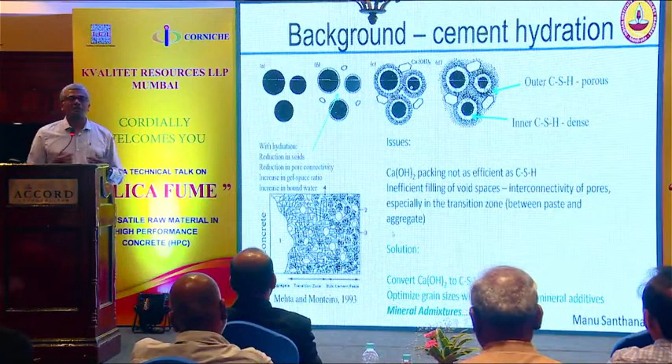So close to the aggregate, you have a zone which we commonly call the interfacial transition zone, where whatever properties of concrete we don't understand, we generally tend to blame on that zone. It's a bonding zone between paste and aggregate. But it turns out there is indeed a difference in the appearance of that zone compared to the remaining part of the paste.

So generally in concrete, if you notice near the aggregate, there'll be more porosity, there'll be more calcium hydroxide, and there won't be as much calcium silicate hydrate, which is the primary binding material formed when cement reacts with water. As a result, we have inefficient packing near the aggregate.

So whenever there's loading of this concrete, the load will concentrate around the stiffer regions. Aggregate being stiffer than the paste will take more load, and the zone around the aggregate will have a slightly higher extent of stress, because of which cracking in the interfacial transition zone begins without much loading itself. It begins at a very low level of load, and that cracking is further worsened because there's more porosity available in the ITZ.

So the packing of the products in the ITZ is not as efficient, and secondly, pores are not filled up properly. Because of this, we generally tend to use mineral admixtures. Any mineral admixture like fly ash, slag, or silica fume will do a good job of filling up the space around the aggregate and densifying the interfacial transition zone.

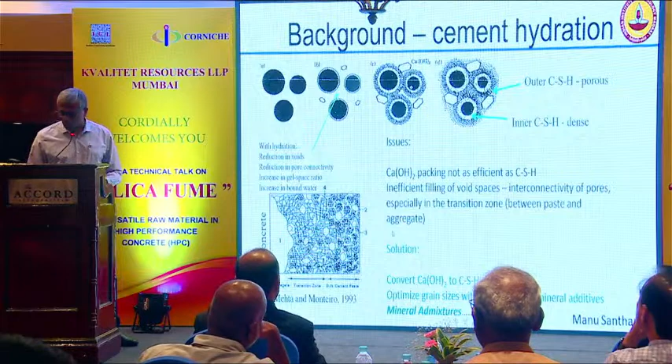Today everybody talks about sustainability, but we have to look at several different aspects when we talk about sustainability. It cannot be just economically viable, or just environmentally good, or just socially good. It has to satisfy all three causes if any technology has to be sustainable. Mineral admixtures help us achieve all of these three, what we call the triple bottom line of sustainability.

Environmentally, of course, we are reducing cement usage in concrete, and when we do that, we are automatically contributing less CO2 to the environment, because cement manufacture is responsible for nearly 6 to 8% of CO2 emissions. Construction itself is about 20%, but imagine 6 to 8% is just coming from cement manufacture. So if you can cut down the extent of cement and concrete, you're already doing positive for the environment.

Second, many of the mineral admixtures are byproducts which would otherwise go as waste or get dumped. We are finding a useful resource from a byproduct, and that's again an environmentally conscious decision.

In terms of the social aspect, when we make concrete with mineral admixtures, we tend to make it in such a way that it has lesser tendency to crack, and it generally performs better in the long run, thus giving a better impact socially. Concrete that does not fail is obviously concrete that is good for society.

And economically also, if you look at the long-term performance, use of these materials is going to give you an improved benefit to cost ratio. As a result, you ultimately end up with a concrete that is more economically viable, but you need to consider the long term. This L1 business of looking at material cost today, that mentality has to go from our minds.

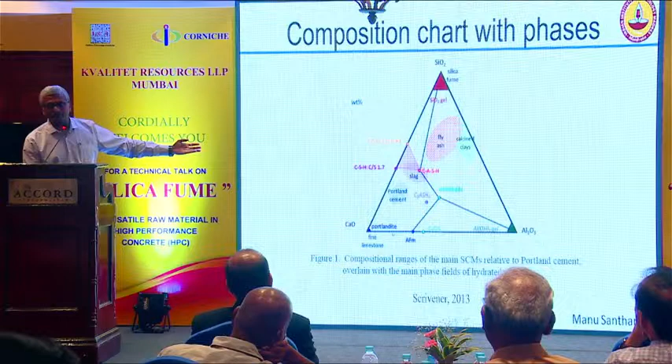Now with silica fume, we are pretty much sure that when we add silica fume, which is reactive silica, it will combine with calcium hydroxide and give you CSH. Now the CSH that you get from that reaction is not exactly the same as the CSH that you get from the cement reaction—both will have different attributes. That's okay. What we need is a material that fills up space, and that's what we get.

So the binders are of different types. One is obviously your cement, or hydraulic cement. Anybody remember why we call cement hydraulic? Why do we call it hydraulic cement? No—all of these need water. All of these systems need water, without which there is no reaction, right?

But cement, ordinary Portland cement, which is rich in calcium oxide, can react with water and set and harden even in wet conditions. Even underwater, cement will react with water and set and harden. That's why it's called hydraulic cement.

Slag possesses something similar. Slag is called a latent hydraulic material, where calcium content is not high enough for it to be reactive on its own. It needs some activation, and that activation, some people call it geopolymer, but what is actually being done is alkali activation. We add alkalis to activate the slag, so we call it AAS, or alkali activated slag, sometimes wrongly referred to as geopolymer, because that's not what's happening there. What is happening is slag hydration.

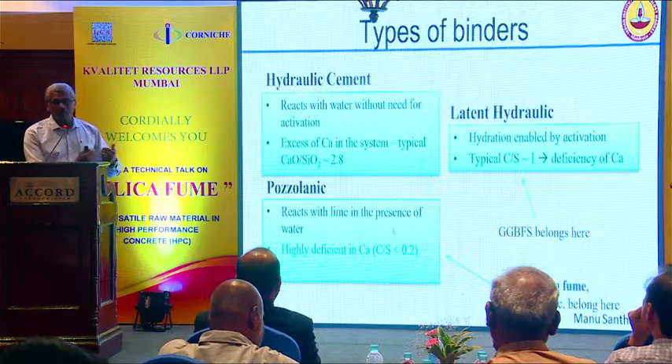So slag can hydrate, it can react with water, but it needs some push or some kick because not enough calcium is there. But when we look at pozzolanic materials, there is no calcium, or almost zero calcium. Silica fume, fly ash, calcined clay or metakaolin, they all belong to the group of pozzolanic materials, which are silica and alumina in abundance, but not much calcium. So there you need to provide calcium for the reaction to happen. Your calcium is coming from calcium hydroxide, from the cement. Cement provides the calcium hydroxide. That's why the combination works very well. When you combine cement, partially replacing it with any of these materials, it works well to improve your microstructure.

So again, just to explain the pozzolanic reaction: you have your calcium hydroxide from the cement reacting with silica or even alumina, because calcined clay will also have reactive alumina, right? And water is an important ingredient, without water there is no reaction. Then you get a mixture of calcium silicate and calcium aluminate hydrates, which is sometimes also given the name CASH, C-A-S-H, calcium aluminosilicate hydrate. This reaction consumes lime, calcium hydroxide, and it refines porosity, as I said earlier. CSH fills up pore spaces more efficiently than calcium hydroxide, so it fills up pore spaces, and obviously that leads to better durability.

It's generally a slow reaction when you consider materials like fly ash or slag. Slag is not really pozzolanic, so this reaction isn't true for slag, but for fly ash or for some grades of calcined clay, this reaction is slow. So when the reaction is slow, it will lower the heat of hydration. But for high purity metakaolin and silica fume, that is not necessarily true. This reaction will be fast, also because the silica is present in very fine, extremely reactive form. And generally when you have alkali or gypsum in the system, like sodium or potassium oxide which is there in your cement, and gypsum also in the cement, this reaction gets accelerated, speeded up.

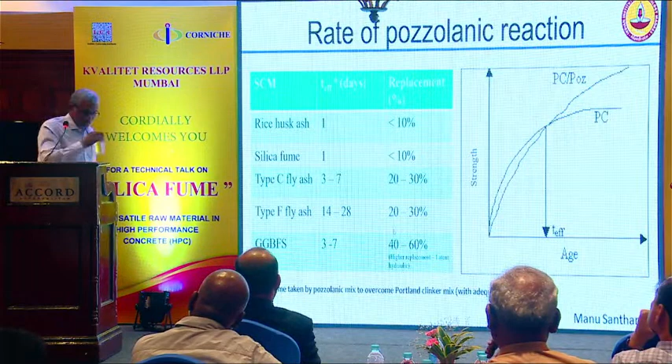At about 20-30% replacement, it will take about 7 days. That's why we need to cure pozzolanic concretes for longer time. Type F fly ash will take a bit longer because it's not as reactive, it doesn't have calcium. So it takes about 14 to 28 days to reach equivalent strength to that of cement.

GGBFS, 3 to 7 days. Again, it depends on the extent, but typically we use a high replacement level of GGBFS, around 50%, in concrete.

Silica fume is typically available in 3 forms. You can get it as it is produced or as collected. You can get it as a slurry or as a densified form. But slurry form I don't think is available in India. It's in the US and some European countries you can get the slurry form.

But what we get most often is the densified form of silica fume. I'll show you why we have to densify it, to get a density which is around 500 to 700 kilograms per cubic meter. I may be off by some extent; maybe the lecture by Mr. Hasbi will have the correct numbers.

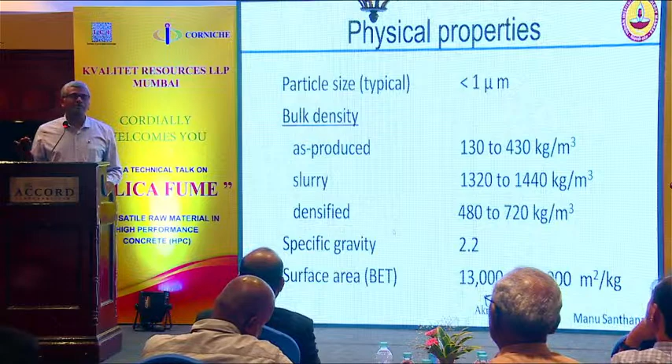Cement particles' average size is 15 to 20 microns. Here we talk about 0.5 microns. So you can clearly see the distinction in the fineness of the material that we are dealing with.

So as the bulk powder is extremely light and the particles are extremely fine, it tends to fly around too much and cannot be packaged efficiently. If you take a regular 50 kg bag of cement and try to pack silica fume in that same bag, you may hardly get 5-6 kgs if you take the bulk powder. That's why, to make it easy to handle and transport, we need to densify it. So dry densified silica fume is what is typically available in the industry.

Here compaction by pressure is done so that the grains get flocculated. They start forming condensed particles. So when you use that in concrete, you obviously need efficient dispersion provided by superplasticizer and good mixing with the aggregate to break down the particles and completely distribute the fine particles of silica fume. That's what you want ultimately.

As a slurry, there are obviously problems because 50% is water. Imagine the storage space - for every 1 kilogram of silica fume, you need to provide storage space for 2 kilograms of material. And compensating for the water in the mix design is a very complicated process. Although as a slurry the mixing of silica fume is very easy, it has its problems of handling and storage.

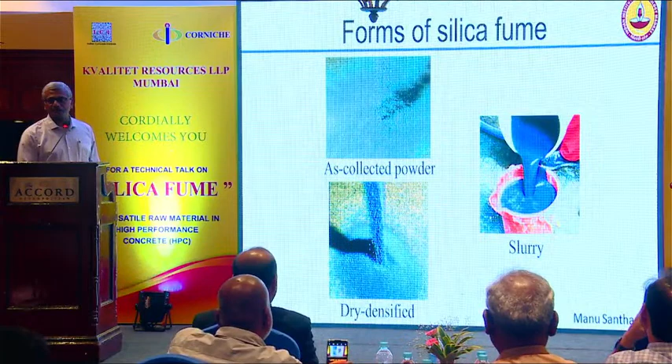Just to show you pictures - I'm sure you'll see better pictures elsewhere - you can see the bulk powder just flies around. When it's densified, it's almost like cement. As a slurry, obviously it's a liquid, so it can be used quite easily and efficiently.

Just to show you a comparison of particle sizes, you can see silica fume sizes are much smaller compared to cement particle sizes - as I said, 0.3 to 0.5 micron versus 15 to 20 microns.

Because of this, the effects on fresh concrete that can be expected include an increase in water demand of concrete. Silica fume should not be used without superplasticizer. Any concrete should not be made without a water reducer or superplasticizer - I always talk about this in every forum. If you are making concrete without chemical admixture, you will be spending too much cement to make simple grades of concrete like M20, M25.

You can optimize your mix and use less cement to produce the same grade of concrete if you use a super plasticizer. So any concrete today which does not use water reducer or super plasticizer is not sustainable in my opinion, because we're using too much cement to get the workability. Since water cement ratio is fixed, you increase the cement to get the workability. But with the super plasticizer you don't have to do that. So that is true of any concrete - you have to use water reducer or super plasticizer to see efficiency happening in concrete.

But silica fume concrete goes without saying, because of the fine particle size and the expected increase in water demand, it should not be used without super plasticizer.

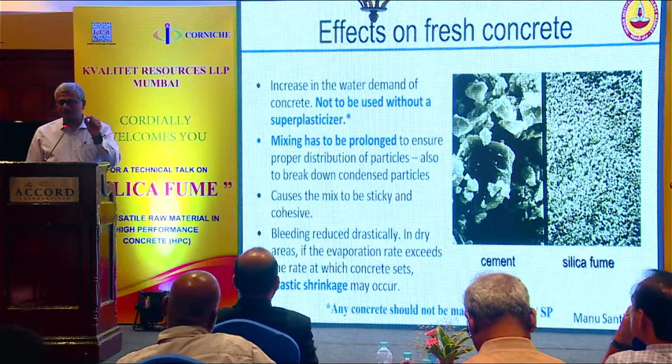Second thing, which many sites are not handling well, is that you need to prolong your mixing with silica fume. Silica fume, as I said, is in condensed form. This has to be broken down and efficiently dispersed by the super plasticizer. How do you break it down? By mixing - the aggregates will tend to break these particles, and the super plasticizer will efficiently deflocculate them. If you don't mix well enough, you're not going to achieve the result you want, because you want that fineness - that's the reason you're putting it in there. You want that 0.3 to 0.5 fineness to really fill up the spaces efficiently. That's when it will work very well, and for getting the reactivity.

Mix can become sticky and cohesive, so you have to design your slump carefully, because any fine material will do that - stickiness will increase.

But more importantly, whenever you're using not just silica fume, but any mineral admixture as a replacement of cement, you can expect that if you don't pay attention to the concrete in the early stages, plastic shrinkage problems will definitely happen. This is true of any concrete with mineral admixture - fly ash, slag, anything - because most of these materials are finer than cement. Secondly, as I said earlier, because you're replacing a denser material with a lighter one, the paste volume goes up. You have more paste in your system, and when you have more paste, you get more shrinkage.

Here also, in the early stages, you need to ensure that you protect your concrete from drying, especially when making slabs with very high surface area. So protection of the concrete is important - simple floating of the concrete when cracks appear in the beginning, especially with flowable concrete like SCC. SCC is being used everywhere now, so with SCC especially, you need to be extremely careful about floating early to ensure plastic shrinkage cracks do not form.

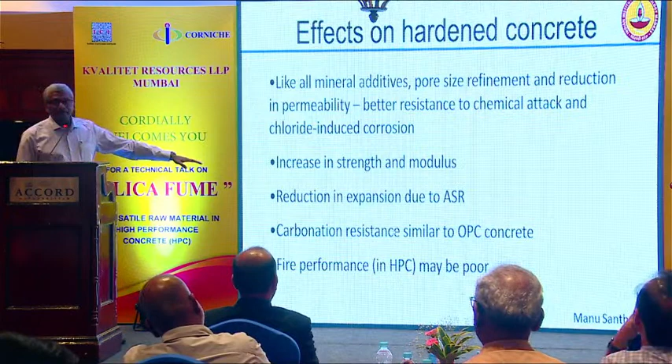In alkali silica reactivity, silica fume can do very well, but that's also true of all mineral admixtures. Whenever your aggregate is not of good quality, if it's reactive, all mineral admixtures will help reduce the extent of expansion. On carbonation resistance, this is where many other mineral admixtures like fly ash or slag, because of the amount we use, generally perform poorer. But silica fume concrete, at least the data we've seen, seems to have similar carbonation performance. Of course, silica fume is used only generally in high-grade concretes, so you'd expect carbonation to be low in any case.

On fire performance, we learned this from the accident in the Channel Tunnel between England and France - fire performance of silica fume linings, the high performance concrete linings, was not good because it's very dense.

When fire transforms water to steam, the steam doesn't have a way to come out of the concrete, so spalling can happen. That's why people recommend polypropylene fibers be used whenever fire hazard is present, because when fire happens, the polypropylene fibers melt and create pore spaces through which the water can escape. So with tunnel linings done in silica fume concrete, if fire hazard is a problem, for instance in a roadway tunnel, one should look at the possibility of also using polypropylene fibers.

So when should silica fume be used? Since I'm not giving a marketing presentation, there are some criteria you should apply. One, it should be used for high strength concrete applications. It's usually desirable in a ternary blended form with another supplementary material, like cement plus fly ash plus silica fume, or cement plus slag plus silica fume. For providing good durability characteristics, especially in rapid chloride penetration tests, silica fume concrete gives excellent results in these environments.

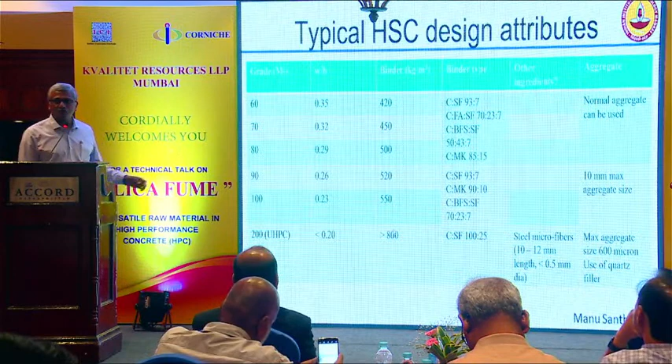Just to give you some indication of higher grades of concrete, here are typical water binder ratios. Of course, this is with Chennai aggregate, because it's not the same in other parts of the country — you may have to alter the designs a bit to get the same strengths. In Chennai, we are blessed with excellent aggregate, because of which we can design concretes with generally lower binder contents and moderately higher water binder ratios than elsewhere.

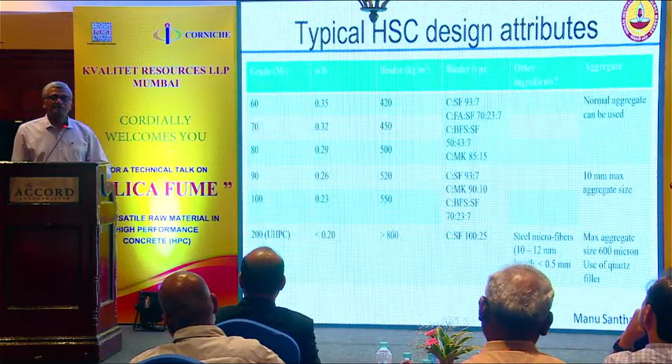But 200 megapascal UHPC is playing a role today. People are trying to look at replacement of steel in some sections — I'm talking about structural steel in compression members, where you can easily use UHPC instead. It can provide sufficiently good flexural resistance also, to give good performance. Here, steel fibers are typically used, short steel fibers, but silica fume is an integral component of most of these high-grade concretes.

So just to summarize, I don't know if I was expected to talk this long, but yeah — silica fume is an excellent material when designed and used with proper supervision and control. Very important to understand that.

Always ensure that the supervision and control with any high quality material has to be top class. It is a desirable ingredient for high performance concrete. You should use it whenever you need to do very good in durability.

Of course, there are products which are also worthy to mention here, like metakaolin, which can produce equivalent durability levels to silica fume, but it needs slightly higher dosages as compared to silica fume. Ultrafine slag can also be another material that we can use, but the extent of durability performance in terms of the test results that it gives you may not be of the level of silica fume.

At least from the data that I've seen. And as I said, it's a necessary ingredient for ultra high strength concrete, without silica fume, UHSC will not be really possible. So thank you all, I'll stop with that.

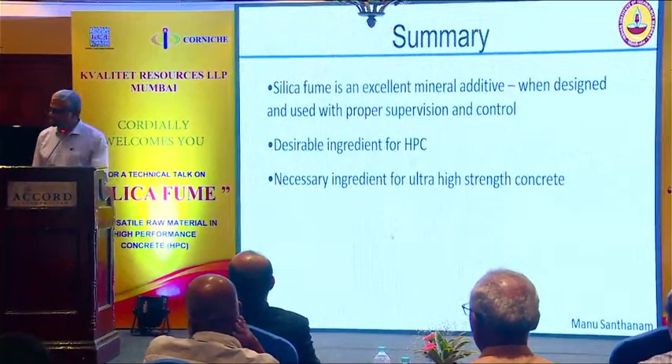Questions at the end or? End, yeah, sure.

Thank you, sir, for creating the platform for today's presentation and providing a detailed understanding of silica fume. So further, we move upon to facilitate our guest of honor, Mr. Rajesh Ladhat, Managing Director, Structural Concept Designs Private Limited, Mumbai. Mr. Rajesh Ladhat is a civil engineer, graduated from BVB College of Engineering and Technology, and he started his career as a design engineer with PT Gala Consultant Engineers, and he has worked for various projects in residential, commercial, public structures, etc. He has started his Structural Concept Designs Private Limited in 2001, and his company achieved the milestone of 1,000th project in the year 2014, and till date they have crossed more than 2,000 projects.

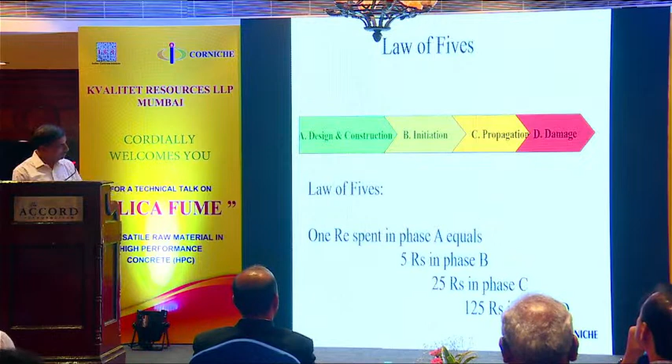I always believe in the law of 5s. Any project, it starts from the drawing board: design, construction, initiation, propagation, damage. And I always tell people that during the construction stage itself, don't be fussy about spending a little more so that the durability will be there, because repairs are always very expensive.

It is not silica flour or silica dust, and it is not micronized silica. Both these products are ground crystalline quartz powders.

And it is not fumed silica, it's not precipitated silica, it's not gel silica and colloidal silica. These are chemically treated silicas, but they go in for different applications, like the rubber industries and pharmaceutical industries.

Coming to development of silica fume concrete, it's not a new product. It has some history. The first fumes were collected way back in 1947. In 1952, samples of silica fume concrete were buried in acidic sulfate-rich soil outside Oslo, and the durability studies are still going on, giving excellent results. In the 1970s, filtering systems and concrete trials first started in Canada.

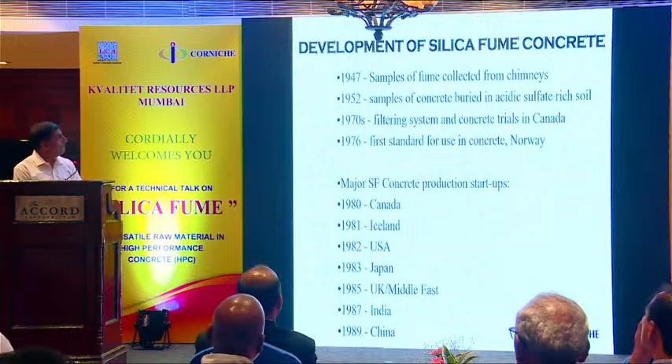Currently, to summarize, there are over 12 standards and codes of practice for silica fume. ASTM C1240 - I have put XX because you should always look for the latest one available; the latest one available now is 2020. And IS 15388, 2017, which is a second revision. There's also the Canadian standard and the European standard.

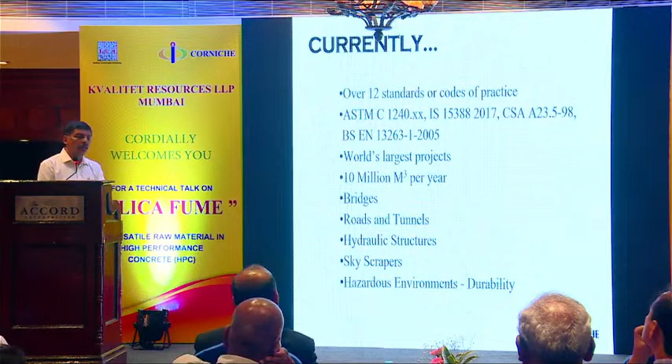It's used in the construction of the world's largest projects, and as per our market guesstimate, more than 10 million cubic meters of silica fume concrete is produced every year. It's used in the construction of bridges, roads and tunnels, hydraulic structures, skyscrapers, and hazardous environments like the Deepak Fertilizer project, which was for durability purposes.

Standards I've tried summarizing here - ASTM, European, Canadian, and Indian. Everything, if you see, requires a minimum amount of amorphous silicon dioxide, 85% minimum silicon dioxide. The next thing I want to show is the loss on ignition and the alkalis.

Loss on ignition - I think slowly they're trimming it down further. It should be less than 6%. The specific surface area requirement asks for a minimum of 15 meters square per gram. And the pozzolanic activity index - ASTM asks for 105%, and our Indian standard asks for 85%.

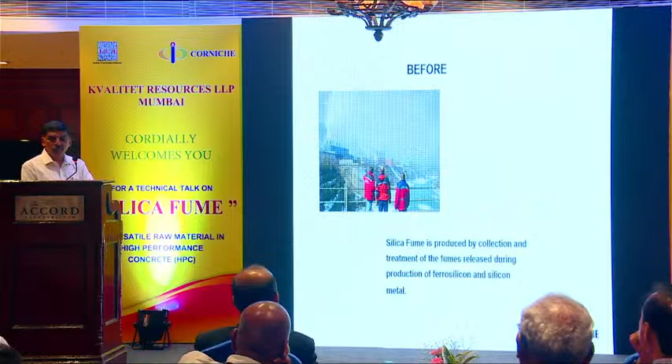This is one of our industries in China. Till the late 90s, early 2000s, this was what it looked like - highly polluted. And my marketing man tells me the dollars were flying.

So today, we are collecting the fumes which are going out as a pollutant. This single plant, this single industry has 18 plants, producing close to 150,000 tons of silica fume annually, and all 18 plants are silicon metal plants.

This is one of the Bhutan plants, which is producing high-grade ferrosilicon. They produce 3,000 to 5,000 tons.

So generally, coming to the metallurgical production of silica fume - I've tried to show how a visible pollution problem is eliminated by removing the silica fume from the smelting furnace, and at the same time, it's used greatly in concrete.

Raw materials are quartzite and black materials. Quartzite is crystalline silica, and black materials are various forms of carbon - coal, charcoal, wood chips, coke, semi-coke. Smelting happens at around 2000 degrees.

It's a two-phase reduction - SiO2 gets reduced to SiO, and SiO further gets reduced to metallic silicon. And since it's an open-top furnace, the intermediate SiO comes in contact with atmospheric oxygen and gets oxidized back to SiO2 - amorphous SiO2 - which would have otherwise gone out as a pollutant out of the chimney.

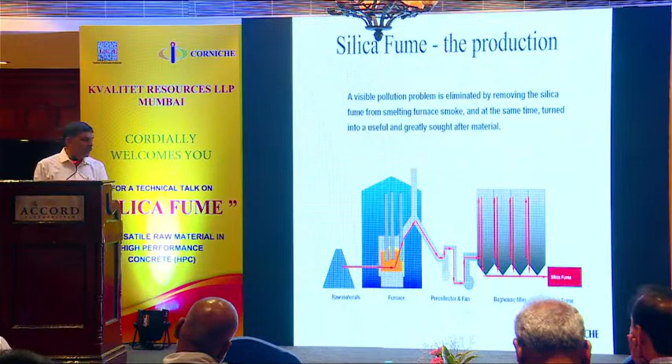So we densify the material for two reasons. One is transportation becomes very expensive — in a 20-foot container which carries 20 tons of other raw materials, we can hardly put 7 or 8 tons of undensified material. By densification, we can increase the quantity and come down to needing fewer containers, handling 18 to 20 tons.

What happens inside? Temperature could be between 1980 to 2010. There's a two-phase reduction — SiO2 getting reduced to SiO, and then further reaction. Metal is tapped periodically, and some of the SiO comes in contact with atmospheric oxygen to get converted to amorphous silicon dioxide.

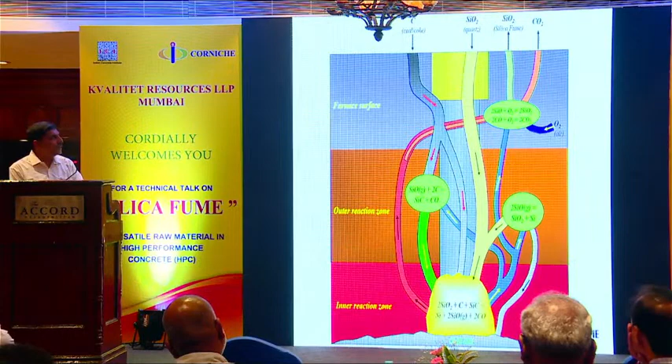The metal, and schematically, the raw materials are quartzite, black materials, and carbon electrode — carbon is also a form of carbon, and we need lots of energy. That is the reason it's not produced much in India. India has very rich raw materials — we have the best quartz available and we have black materials, but power is very expensive here.

To produce 1 ton of silicon metal, we need 15,000 units of power, and to produce 1 ton of high-grade ferrosilicon, we need 10,000 units of power. So India is the only country which exports quartz to the countries that produce silicon metal.

So when I show this particular chart — silica fume today is no more a byproduct, it's a co-product. We are designing the raw materials, what you'd call the mix design; in metallurgical terms I call it the burden calculation. I put the right amount of material to produce two products: the silicon metal and silica fume. In case of ferrosilicon, it's high-grade ferrosilicon and silica fume — silicon metal, the lumps, and the fume.

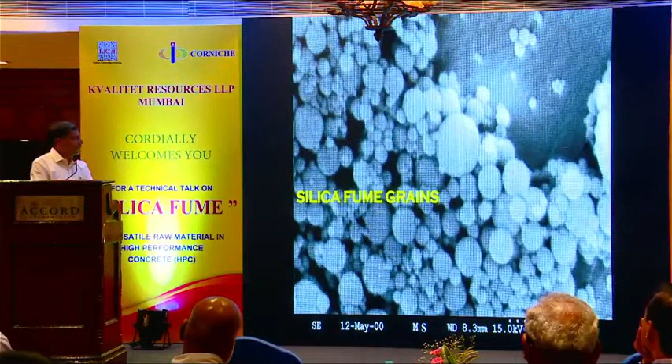How does the silica fume look like under SEM? Perfect spheres, amorphous spheres, 0.15 microns in diameter — finer than cigarette smoke. Silica fume, a product of the silicon alloy industry, is made of glassy microspheres, 0.15 microns in diameter average particle size. It's a pozzolana, it reacts with calcium hydroxide, and it could be anything between 85 to 98% amorphous reactive silicon dioxide.

So, as Manu sir said, it forms an undensified material of 150 to 350 density. We densify it pneumatically to bring the density between 500 to 700. And in a few countries, you get the material in pelletized form also. In a country like Iceland, the aggregates are very reactive.

Use of silica fume in every kg of cement is compulsory there, so they get silica fume in pelletized form and it's interground in the cement production itself — they use silica fume blended cement there.

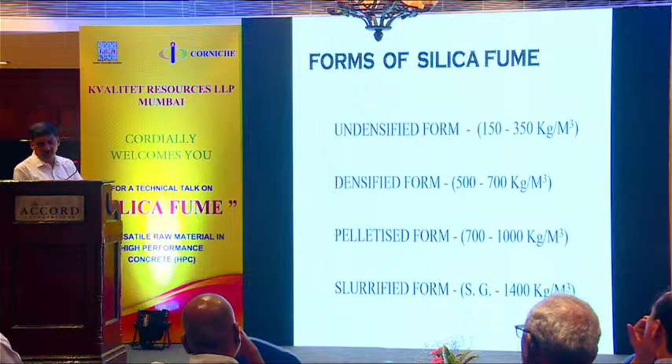And the slurry, as Manu sir said, its use is very common in Europe and the US. It's very simple — slurry is nothing but 50% water and 50% powder. If I want to import it into India, I'll have to pay for transportation of water, and I'll pay import duty for water too — it becomes very expensive. Only one project, Bandra Worli Sea Link, used this, where we produced instant slurry at site, not a stable slurry.

Undensified silica fume has a bulk density of 150 to 350, densified between 500 and 700, and slurry is 1400 kg per meter cube. These are the densified material, undensified material, and the slurry forms.

Properties of silica fume: it's amorphous in nature. When I say amorphous in nature, there's no health hazard, no health risk. You can breathe it in and breathe it out.

Its particle shape is smooth, spherical particles, with particle size of 0.15 microns. It's approximately 80 to 100 times finer than cement particles. Specific surface area is 15,000 to 30,000 meters square per kg.

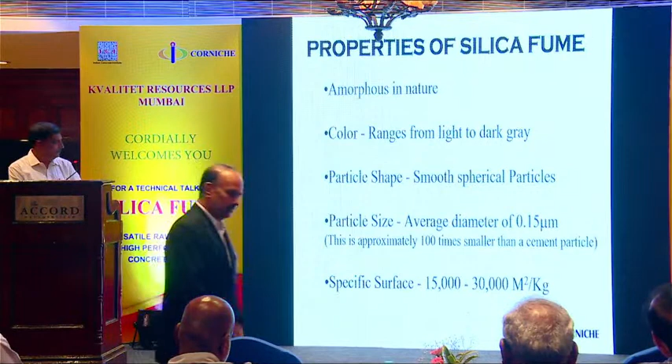What do you mean? Take a standard football - the quantity of silica fume which can be filled in the football, that quantity can be spread over the entire football ground. It covers that much amount of area.

So I've tried comparing silica fume with fly ash, slag, and OPC. It stands out in two things. It's highly siliceous as compared to the other three.

And see the fineness - while the other three fall between 300 and 700, silica fume is a minimum of 15,000 to 25,000 meters square per kg. The other three are measured with Blaine's method, and here we use a BET nitrogen adsorption method.

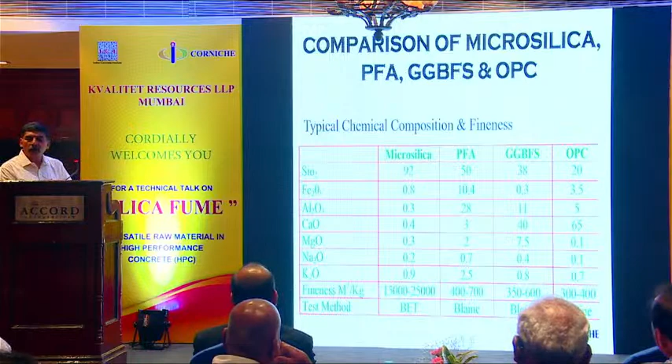Basically, physically it acts as a filler, and chemically it reacts with calcium hydroxide to form calcium silicate hydrate gel.

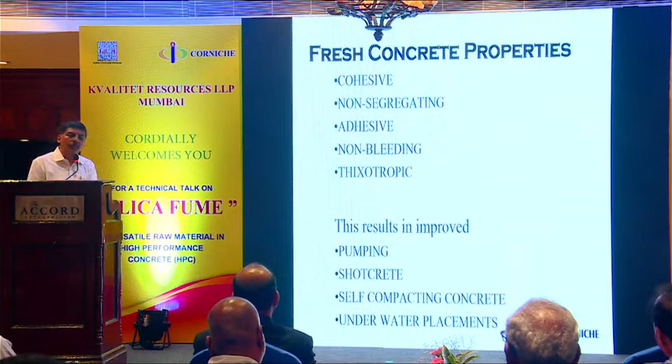This results in improved pumping, shotcrete applications, self-compacting concrete, and it can be placed underwater. There is no washout.

Non-segregating - this is a 250 mm plus slump. Two things you observe: the formwork is not all that good here. Had it been ordinary concrete, slurry would have come down from the bottom. Also the water standing on the floor is not getting mixed with the concrete. Silica fume concrete does not allow anything in, nor does it allow anything to get out.

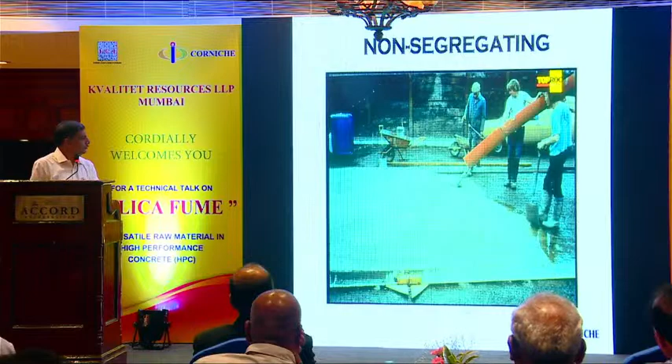It can be pumped to various distances, various heights, with no segregation.

Placing, finishing, compacting, curing - since silica fume concrete is produced with a very, very low water binder ratio, curing has to be adopted immediately because the surface tends to dry off.

So silica fume concrete does not bleed. It must be cured properly to prevent drying out, especially in a hot weather environment like ours. Common practices include mist-spraying, ponding, membrane coating, wet hessian, shading, and minimum 7 days wet curing.

So hardened concrete properties - it makes the concrete stronger, impermeable, and both put together, durable. And durability against abrasion, erosion, against chemical attack, against water, chlorides, sulfate, and ASR - alkali silica reaction.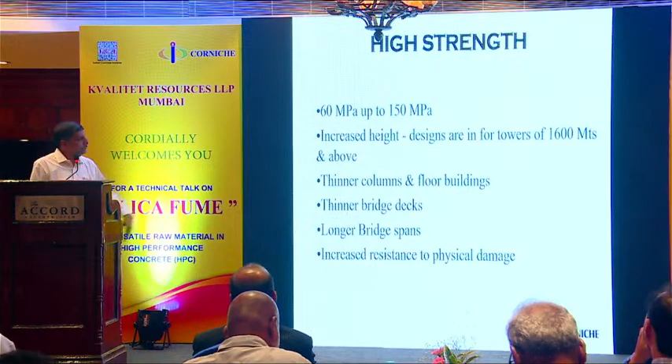High strength - since the last 2 years, I have changed those numbers. I used to operate at 45 in India, up to 90, 100. Now, since they are producing high-grade concrete, I've increased it to 60 to 150. We are producing really high-strength concrete today in India. Increased height designs are there for towers of 1600 m and above - thinner columns at floor buildings, thinner bridge decks, longer bridge spans, increased resistance to physical damage. These are the advantages you get.

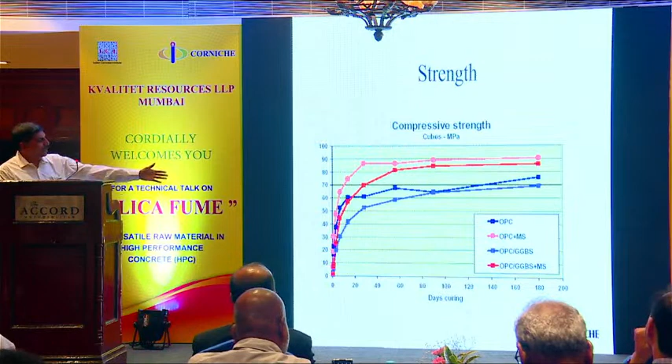And for strength, if you see, in silica fume concrete you are able to achieve the desired strength in the first 7 days itself, minimum 80%. And ternary blends, triple blends, are even better. Here I've taken OPC, GGBS, silica fume - it will be a similar pattern with OPC, fly ash, and silica fume.

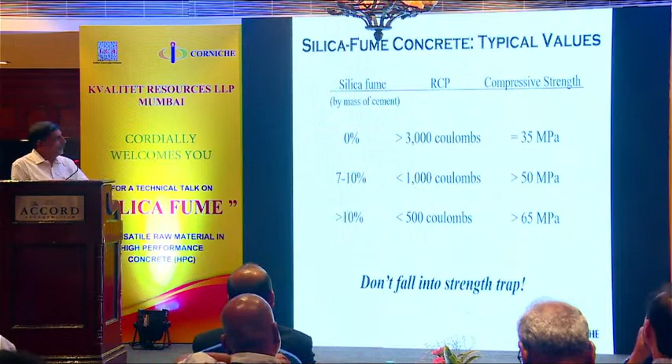So for silica fume concrete typical values, by adding 7 to 10%, you will be able to achieve less than 1,000 coulombs. Above 10%, I would not recommend, because, as Manu sir said, it just acts as a filler. And since we are importing it, it's a very expensive filler in India.

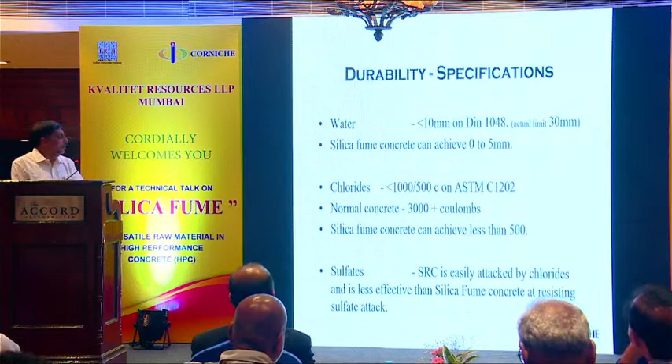So durability specifications, as per DIN, ask for 30, but many designers are specifying less than 10 mm. Silica fume concrete can achieve less than 5 mm. In most cases, it is nil, less than 2 mm. For chlorides, they are specifying 1,000 coulombs in very aggressive environments - they are even specifying less than 500 coulombs.

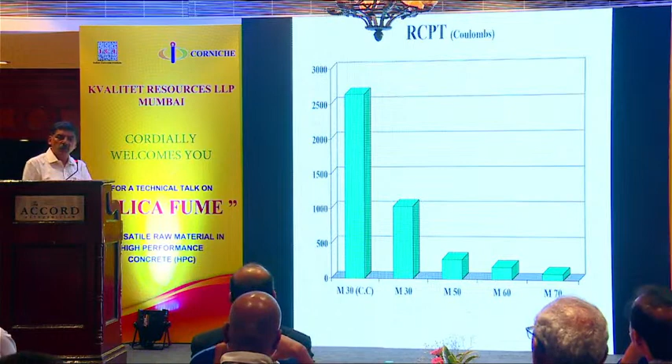So, silica fume based abrasion resistant concrete - I showed you about the Kinzua Dam. I'll show some slides. It was built in 1967. It came up for first repairs in 1973-75. The primary conclusion was that the aggregates were not hard enough - they were soft, local aggregates.

So the conclusions: do not use fiber reinforced concrete, use the lowest possible water-cement ratio, use the hardest available aggregate. Continuous efforts to fight this problem led to high strength concrete containing silica fume.

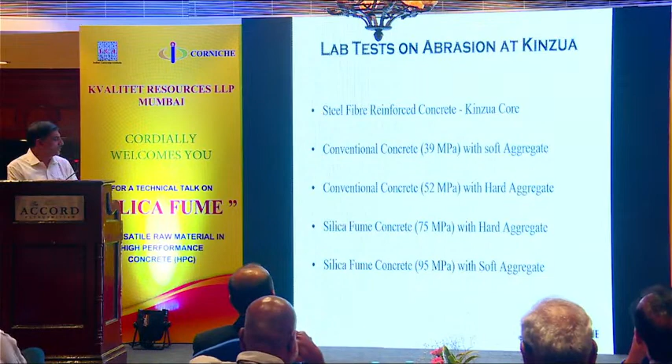So what lab tests did they do before coming to the silica fume concrete? Steel fiber reinforced concrete with Kinzua - that's a local aggregate - conventional concrete with soft aggregates, conventional concrete with hard aggregates, silica fume concrete with hard aggregates, and silica fume concrete with local aggregates. It's a 72-hour testing. Every 12 hours they take out the sample and see the weight loss, which has been jotted there.

Specification-wise, finally what they did was - they wanted around more than 80 megapascals. Cement, maximum 415 kg. Silica fume, minimum 15% - as a salesman, I'll be very happy to sell more silica fume. And the water-binder ratio was 0.3. This is in 1985 in the US.

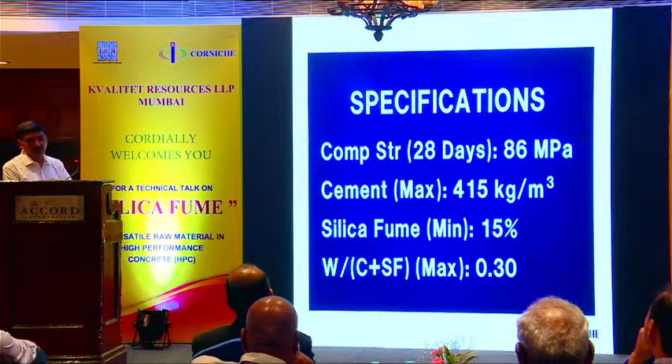Ultimately, what they used there was 386 kg cement, 70 kg silica fume, water-binder ratio 0.28, a minimum 250 mm slump. The results: 7 days, 69 megapascal, and at 28 days they were hitting 95 megapascal, even with the local soft aggregates.

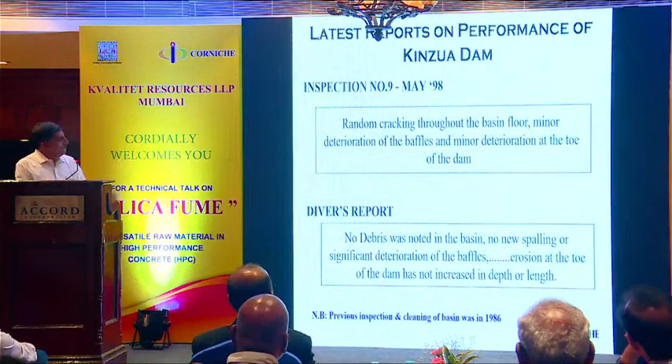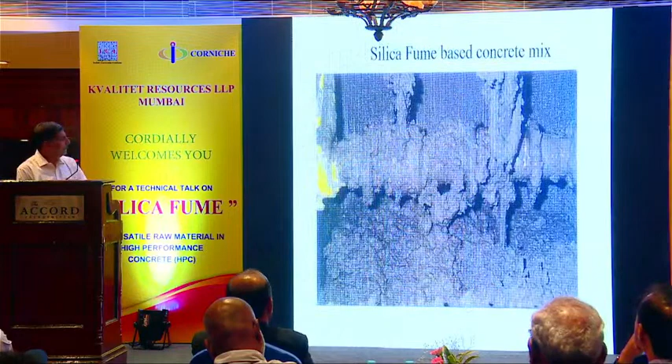Mixing is very important - I would recommend very good mixers. This is a very fine material, dispersion is key. This mixer is really working well - look at it closely. The mixing sequence also comes purely through experience.

Coarse aggregates - add silica fume into the mix as early as possible, along with the aggregates, because the densified material has to disperse. It starts breaking down when it comes in contact with aggregates. Then fine aggregates, some water, remaining fine aggregates, cement, superplasticizer, and water. Make sure you add superplasticizer only when cement is in the mix, because when we tried mixing silica fume with superplasticizer directly, it binds and makes a ball - it doesn't allow silica fume to disperse.

For the mixing sequence at site, we won't have the same luxury as in the lab. So: coarse aggregates, fine aggregates, silica fume, cement, superplasticizer, water. The only recommendation is to mix as much as possible - don't be in a hurry, give more mixing time for better dispersion.

So the mixes for Tehri are M30, M50, M60, M70, as you can see. For Tala, in this case it was slag cement; with Tehri it was OPC.

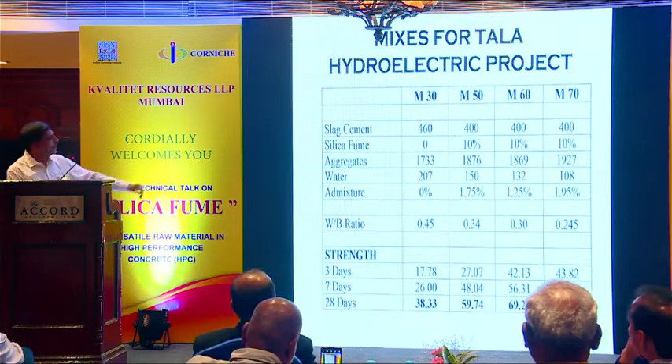The only change we made was the RPM - what's recommended as per ASTM is 1100 RPM. What we were given to understand is that the velocities of water encountered in any dam here are approximately 45 to 60 meters per second. Working backward, with 1100 RPM it was way, way too slow - it was giving us only 18 to 20 meters per second. So we increased the speed by 3 times. All the tests we did in India were at 3,360 RPM, to simulate and come closer to real life conditions.

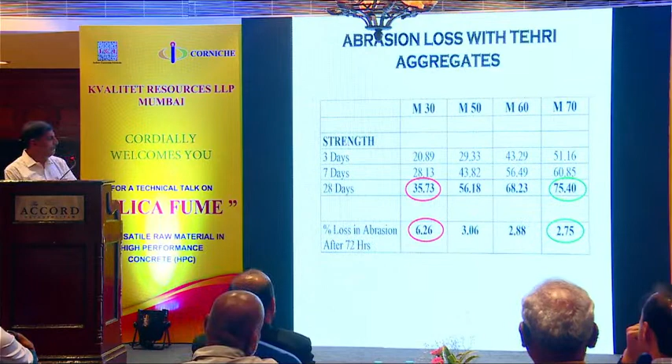Abrasion losses, you can see - the numbers with silica fume concrete are coming down. I'll show the condition of the samples. When we went beyond 72 hours of running this, the conventional concrete started giving away completely, while the silica fume concrete was flat - no abrasion.

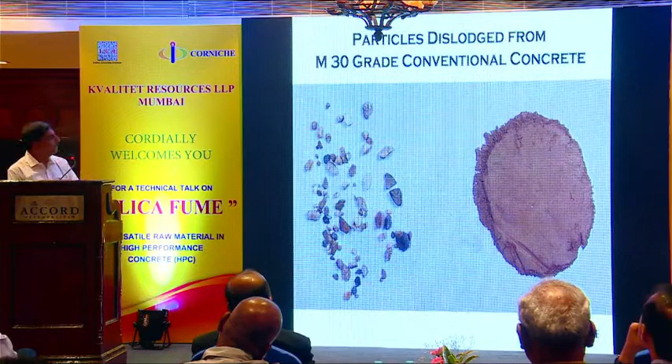Same with Tala. This is a 28-day cured sample before putting into testing - conventional concrete, M30. After 72 hours this was the state - lot of wear and tear, and the bond was not good, so aggregates were peeling off because of a weak bond. You can see cracks and aggregates peeling off closer up. We collected the residue, the worn material, and you could see some of the peeled aggregates because of the loose bond in conventional concrete.

With silica fume, M70, after 72 hours only the top watery layer had gone off. The bond looks good - have a look. And in the residue there's no peeling of aggregates or anything - they were holding on.

So the observations: use of silica fume concrete helped in reducing the loss on abrasion by around 40%. The cracks around the aggregates in conventional concrete indicate further dislodgement of aggregates if tests were continued, while a good bond between aggregates was seen with silica fume concrete. Strength alone is not the criteria - use of silica fume concrete helps in attaining high strength and ensures better bond between aggregates, making the concrete highly resistant to abrasion and erosion. This improved durability makes high-performance silica fume concrete the most suitable one for hydraulic structures.

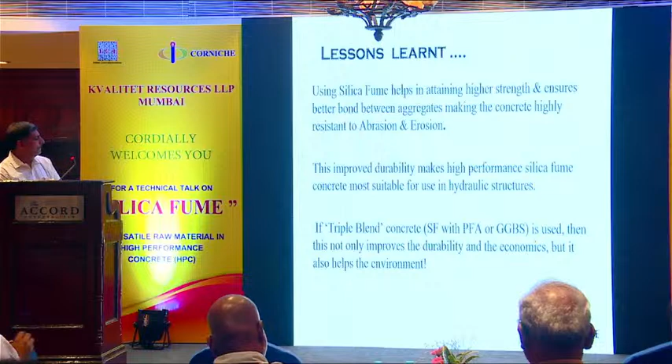So ternary blends can be even better - that has been shown in Tala with slag cement. High-strength silica fume concrete does work as anticipated in situations of high exposure to abrasion and erosion forces.

Coming to high-performance concrete in India, it's been used in construction of nuclear power projects, hydropower projects, roads, bridges and tunnels, high-rise structures, repair and rehabilitation projects, and hazardous environments - the Deepak fertilizers, as I mentioned.

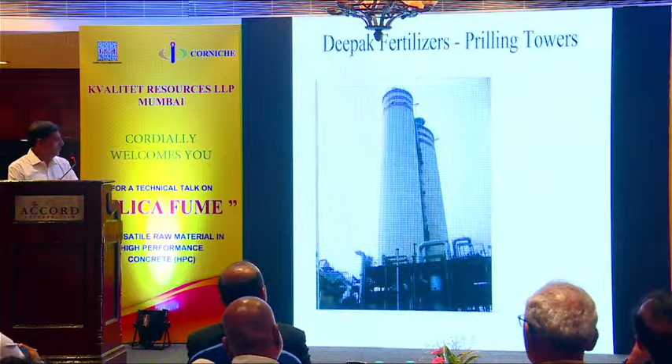This is the Prilling Tower and Deepak fertilizers. This picture I had taken in 2019. It was done in 1990-91 and still looks new. M35 concrete. Along with the aggressive raw material, they were using acid also as one of the raw materials for producing it, so it's basically an acid resistant concrete.

Nuclear power projects. I think after the Kaiga accident, they went in for the silica fume concrete dome, after consulting with the CEA of France. They used 2,000 cubic meters of concrete per dome for the 2 domes. Same with Kota, they parallelly started that in 97-98. Based on the usefulness and what they saw, Tarapur, the new greenfield project, used almost 125,000 cubic meters. The entire reactor building is done with silica fume concrete.

Today I think they're specifying it for nuclear waste handling systems to prevent radiation leakages. The requirements were that the pressure containment vessel should satisfy structural integrity, leak tightness, serviceability, and durability. High-performance silica fume concrete was able to cater to all these requirements.

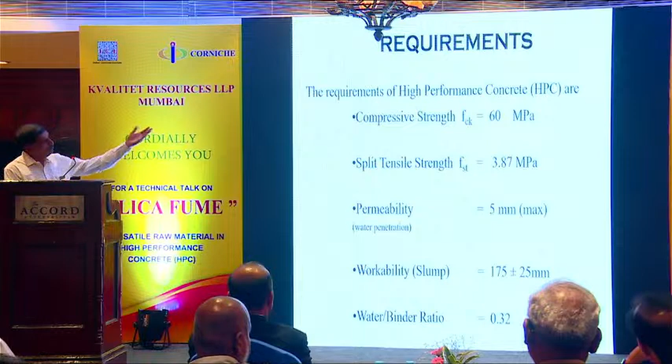They wanted compressive strength of 60 MPa. More than compressive strength, they wanted a split tensile strength of a minimum of 3.9 or so. By doing an M60 concrete, they ended up with a mean target strength of 74-75 megapascals, and a split tensile strength they were able to hit up to 4.5 megapascals.

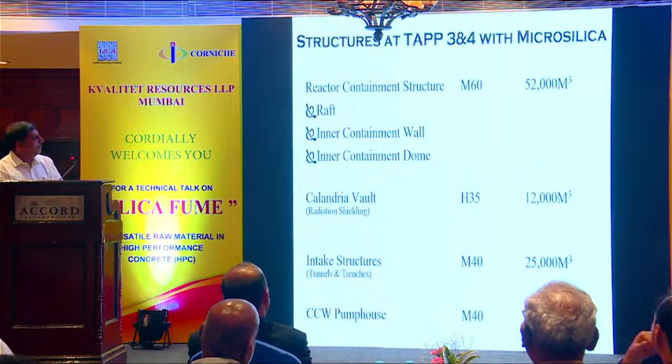For Tarapur, I think M60 was used for the reactor containment structure. Then the Calandria Vault used high density concrete for radiation shielding. The aggregates were hematite ore, and the density of the concrete there is 3.8 to 3.9. They used silica fume for 2 things: no segregation, and to give impermeable concrete.

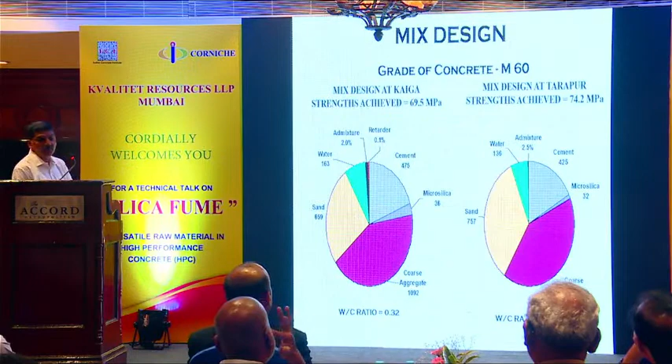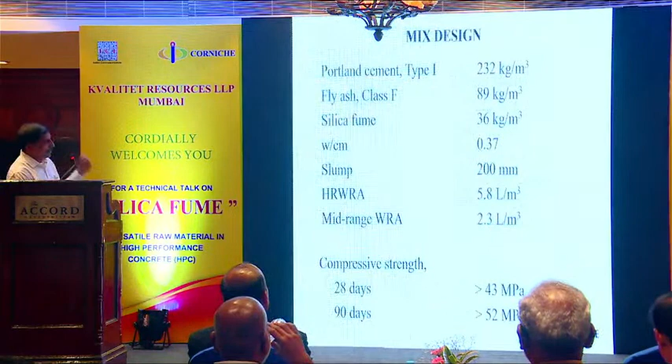I think it was fully dedicated to nuclear power structure, so I've taken this particular thing again. I think this was imposed in the nuclear fuel handling system. See the mixes what they have used there - 232, 89, 36, roughly around 8% silica fume. And the results they achieved were a typical M40 leak-proof concrete.

In India, they have done this in Tarapur and Kalpakkam, and I think others will follow. Coming to hydropower projects, we are the world leaders. A lot of silica fume concrete is used in the construction of hydropower projects.

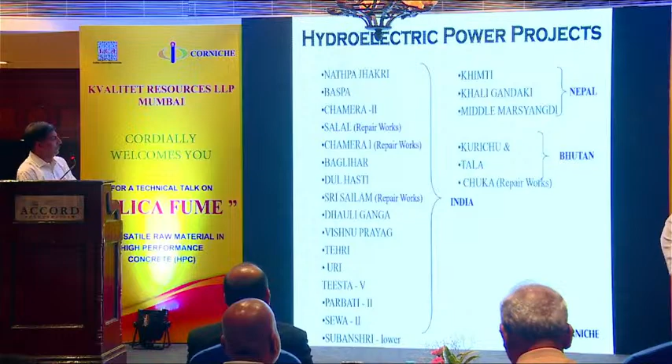Nathpa Jhakri, Salal - this was the first one, before implementing it, I think the repairs were done on this particular thing in 1991-92 on the Stilling Basin. Dulhasti, the first NHPC project, was the new project which used silica fume concrete.

M60 concrete - you see the amount of cement they used there, 500 kilos of cement. Today we are able to produce the same M60 concrete with 360-380 kg of cement. That's an improvement in concrete technology.

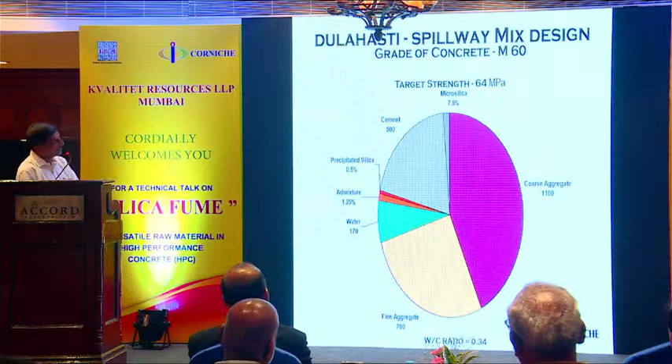One more thing I want to show - they were not fully confident that silica fume would stop segregation, so they had added 0.5% precipitated silica also there for the first project. With that experience, in all subsequent projects they removed the precipitated silica - silica fume concrete can handle it on its own.

Larji, again for shotcrete. Chamera for dams. And the flushing tunnel.

Srisailam Dam went through major repairs, actually in 1998 to 2002. 2,500 cubic meters of concrete was placed underwater with no washout. Further consolidated grouting was done there - it was endless, they went on and went on.

Kurichu Dam, the first hydropower project in Bhutan, where silica fume concrete was used for the Stilling Basin. Then Tala, a big project for us, 1,020 megawatts - the tender specified a quantity of only 73 tons of silica fume. 9-10 years later, when the project was completed, they consumed more than 22,000 tons of silica fume.

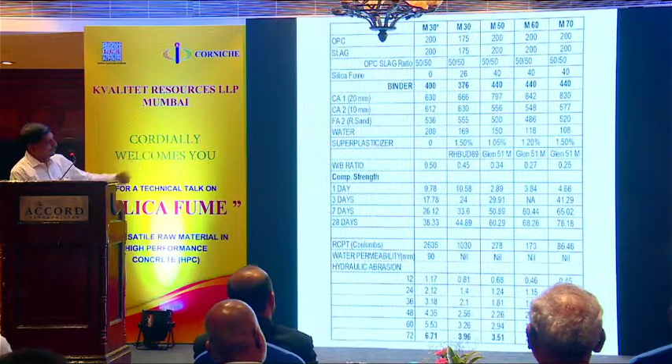The 28.5 kilometer tunnel - the entire tunnel was shotcreted with silica fume steel fiber shotcrete, SFRS, typically M30 SFRS. The mixes, the testing we had done - I've just compiled all the results here.

The spillway bucket - they ultimately used M60 concrete for it. Underground powerhouse, desilting chamber. It's a 92-meter high dam and 130 meters in length.

It's in operation now.

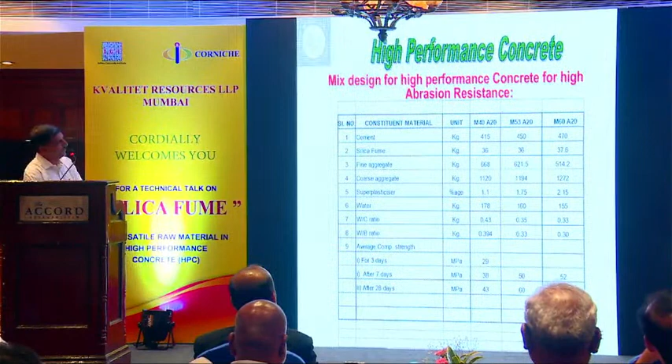From the mixes, what they have used: M40, M50, and M60. Silica fume concrete has been used in all these three grades of concrete. This is the Omkareshwar, again used in the spillway.

Coming to shotcrete, I'll use a few slides. Silica fume concrete shotcrete basically substantially improves the adhesion and cohesion properties of shotcrete. You are able to single spray as thick as 400 mm and above. It can be sprayed on surface with flushing water without any washout. There is a substantial decrease in the rebound using silica fume shotcrete.

With OPC, we can hardly build 60-80 mm in a single spray. With silica fume, more than 600. And look at this gentleman, he's not afraid that the concrete will fall on him. The silica fume shotcrete is standing on its own.

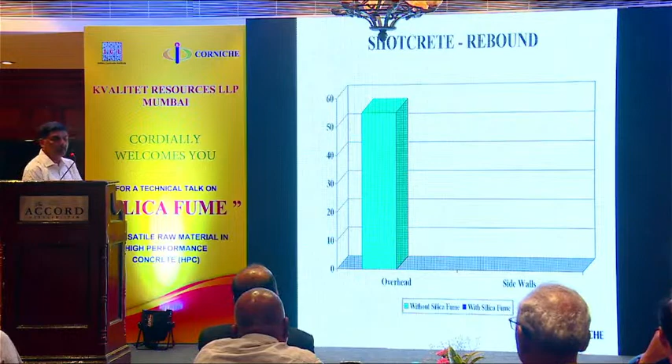These are the actual numbers from Mumbai-Pune Expressway. The ordinary shotcrete gave almost close to 60% losses, rebound losses, on the overhead crown. With silica fume, we are able to bring it down to 7.5-8% with SFRS. On the sides, it was almost 30%, and we are able to bring it down to just 2-3%. All the 6 tunnels on Mumbai-Pune Expressway are shotcreted with silica fume shotcrete.

First one is Bhatan. Once you start from Mumbai, Bhatan is the first tunnel. So SFRS, you can see it's M30 shotcrete. Kamshet is on the other side, post Lonavala towards Pune, Kamshet 1 and Kamshet 2. Madap is the second one.

Coming to buildings and commercial structures, a lot of contribution from Mr. Ladad on this in Bombay and surrounding areas. This in Bangalore, the Sathya Sai Super Speciality Hospital - Larsen & Toubro people have done it. They have used silica fume in the domes there, M35 concrete.

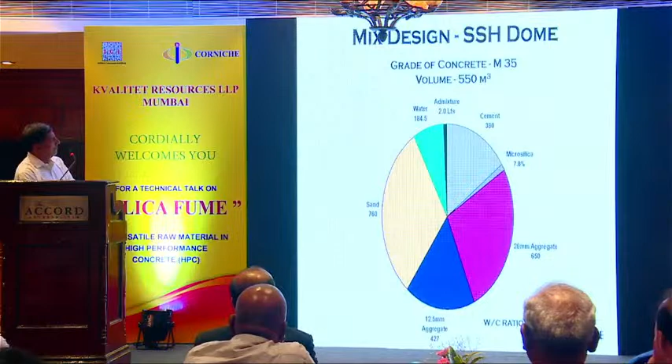Ramakrishna Mandir ferrocement shells, it's used with silica fume - the entire temple is done with silica fume ferrocement shells. Look at the strength they got: 28 days, 66 megapascals.

One of the first high-rise buildings in Mumbai in mid-90s, Raheja, on the western side, Kandivali. They specified M60 for columns, residential tower. Look at the mix: 425 kg cement, 40 kg of silica fume. In 28 days, they were hitting 72 megapascals, and water cement ratio 0.28.

The Parliament Library building, again Larsen & Toubro have done that. They have used silica fume concrete there.

This was the project I was talking about, Kesar Solitaire. 3-tier basement, close to 5,000 cubic meters of self-compacting concrete, M40. I think columns for the first 14 floors were M75, and 15th onwards up to 32 it's M60 concrete.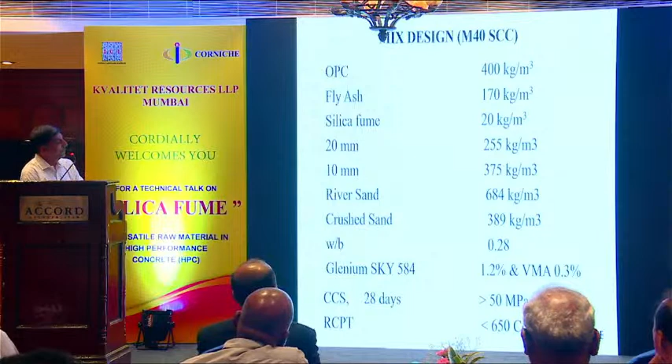Mixes for self-compacting concrete - you can see at 28 days they were able to hit more than 50 megapascals, and RCPT less than 650 coulombs, with 400 kg cement, 5% silica fume, 170 kg fly ash. For M75, 475 kg cement, 80 kg fly ash, and 50 kilos of silica fume. Mean target strength at 28 days was 83 megapascals, and RCPT was less than 400 coulombs.

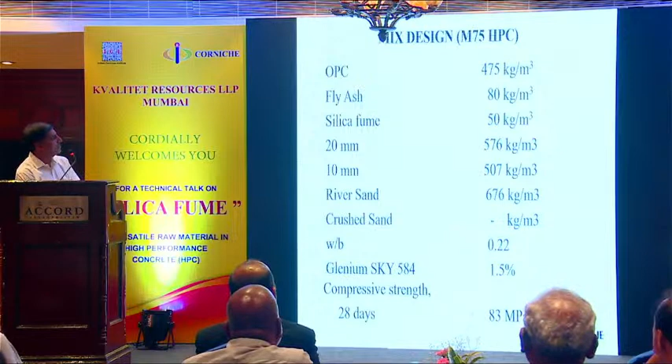Some other projects I'm just showing where they have used M40 HPC, M75 for the columns again, and M75 HPC for Oberoi constructions. I think probably more than 20 towers are done by Larsen & Toubro. The columns were M75, and M60 at a later, higher stage.

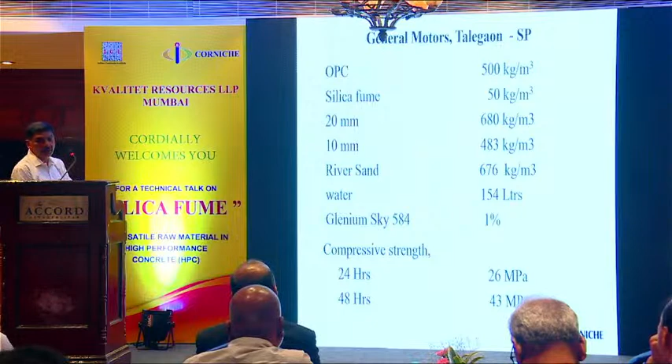General Motors - this example I want to give because these people wanted faster construction, they wanted early strength development. The work started after New Year, and they wanted to complete it before monsoon. Silica fume and PC-based admixture gave them the results. In 2 days, I think basically they needed minimum 35 megapascal strength.

Again, one more - IT Tower. These are all, I think, Mr. Leather's projects.

Coming to roads and bridges, JJ flyover is a landmark for us - the first M75 grade concrete done in India. Again, 500 kilo cement, 501 kilo cement, and 10% silica fume.

Slender sleek column, Adar Consultants - 50 kg silica fume, and see the water cement ratio, 0.29.

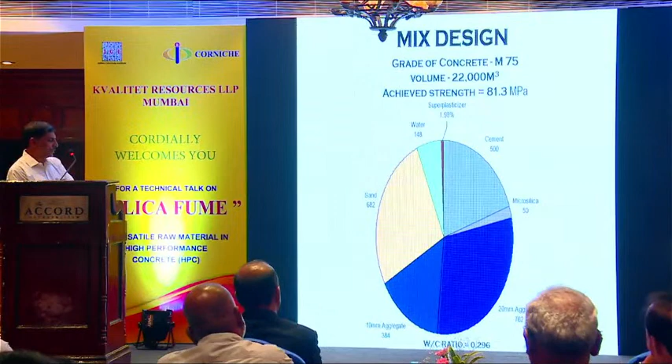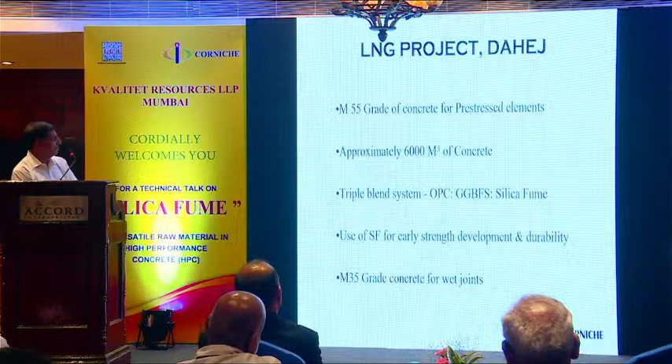And the LNG project, Afcons did it in Gujarat, basically in Kutch. This was for their early strength development. They used silica fume there: 200 kg OPC, 265 kg GGBS and 35 kilo silica fume, 0.29 water-binder ratio, M55 concrete.

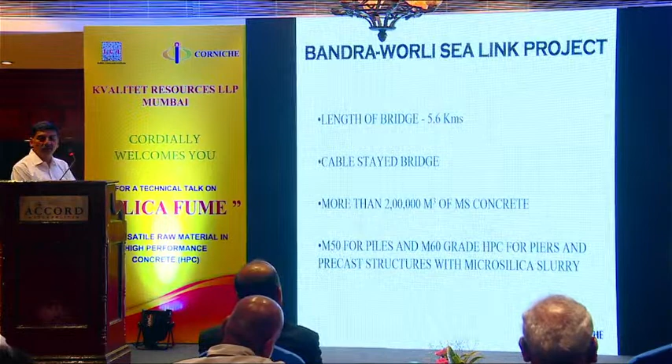Bandra Worli, 5.6 kilometers cable stayed bridge. Eventually, I think it was 375,000 cubic meters of concrete. M50 for piles and M60 grade for piers, pier caps and superstructures.

I think I should give my regards to Mr. N.G. Joshi, the concrete technologist. He was the first fellow to stick his neck out and said, let's not have more than 400 kilo cement. And he was able to achieve M60 with 380 kg cement.

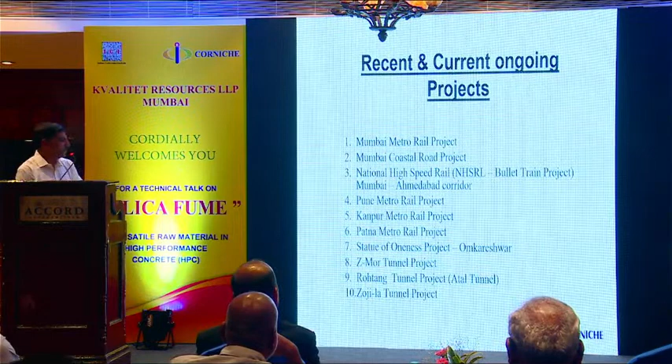These are some of the old and new, recent and ongoing projects, as data are being collected, photos. I have listed just a few projects. It's being extensively used in the Mumbai Metro Rail project, Mumbai Coastal Road project, Bullet Train project, Pune Metro, Kanpur Metro, Patna Metro, and the Statue of Oneness in Omkareshwar by Larsen & Toubro. We have supplied to Z-Morh Tunnel in northeast of Srinagar, Rohtang Pass Tunnel, and now the ongoing Zojila Tunnel. Silica Fume concrete is being used.

Paradise Group, I specifically want to mention 3 projects they are doing. It will be, I think, 1.2 million cubic meters of concrete - 2 townships and 1 commercial, designed by Mr. Gladder. The entire 1.2 million cubic meters of concrete is performance-based concrete.

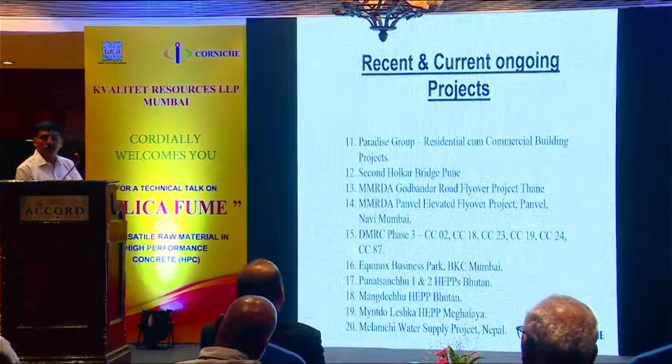Second Holkar Bridge in Pune, M80 self-compacting concrete for the central pier. Godbandar Road flyover project in Thane, the Panvel elevated project in Navi Mumbai - all these are MMRDA projects. And DMRC phase 3, we have supplied to 10 to 12 packages there, but these 5-6 I have taken where major concrete has happened. Then Equinox Business Tower done by Leighton in BKC - almost 150,000 cubic meters of M60 and M80 concrete there.

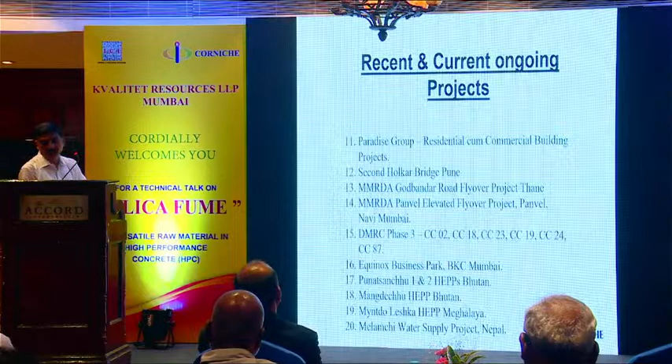And some hydropower projects - Punatsangchhu 1 and 2 in Bhutan, Mangdechhu in Bhutan, Myntdo Leshka mentioned 130,000 cubic meters. Concrete grade was not big, water was acidic there, pH between 4.5 and 5 - M30 concrete, but silica fume concrete. Melamchi Water Supply Project in Nepal, 28 to 30 kilometers, entire thing with silica fume shotcrete, SFRS.

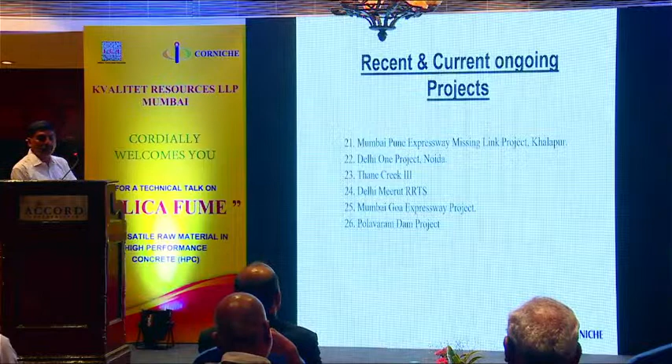Now the ongoing Mumbai-Pune Expressway missing link project, which again Afcons is doing - it's an ongoing project. Delhi One project in Noida - again Larsen & Toubro have done it, I think almost 150,000 cubic meters of M60 and M80 concrete. The Thane project has just started. Delhi Meerut RRTS, Rapid Rail Transport, Mumbai-Goa Expressway, and the Polavaram Dam project in Andhra Pradesh - they've used lots of silica fume concrete. The list is there, but I tried mentioning just a few.

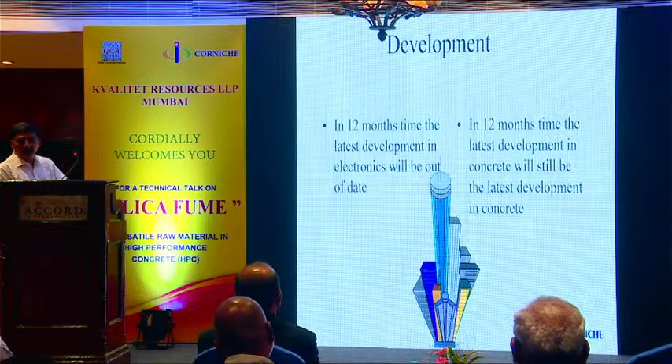So HPC, it's all about team effort. We all have to put our hands up together to make it possible. Thank you. Thanks for your patience here.